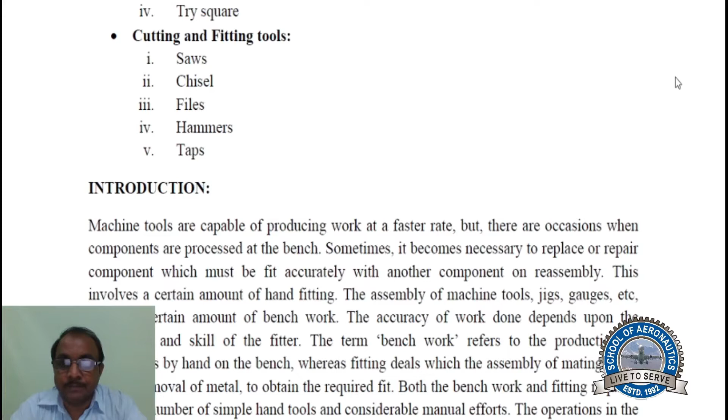Introduction. Machine tools are capable of producing work at a faster rate, but there are occasions when components are processed at the bench. Sometimes it becomes necessary to replace or repair a component which must be fit accurately with another component on reassembly.

This involves a certain amount of hand fitting. The assembly of machine tools, jigs, gauges, etc. involves a certain amount of bench work. The accuracy of work done depends upon the experience and skill of the fitter. The term bench work refers to the production of components by hand on the bench, whereas fitting deals with the assembly of matching parts through removal of metal to obtain the required fit.

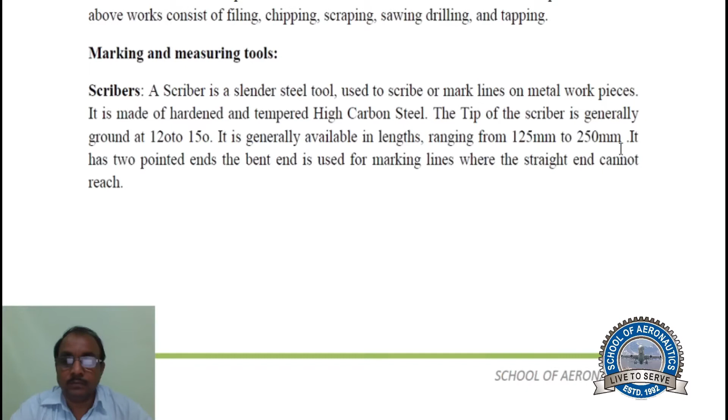Divider. It is basically similar to the calipers except that its legs are kept straight and pointed at the measuring edge. This is used for marking circles, arcs, laying out perpendicular lines by setting lines. It is made of case hardened mild steel or hardened and tempered low carbon steel. Its size is specified by the length of the leg.

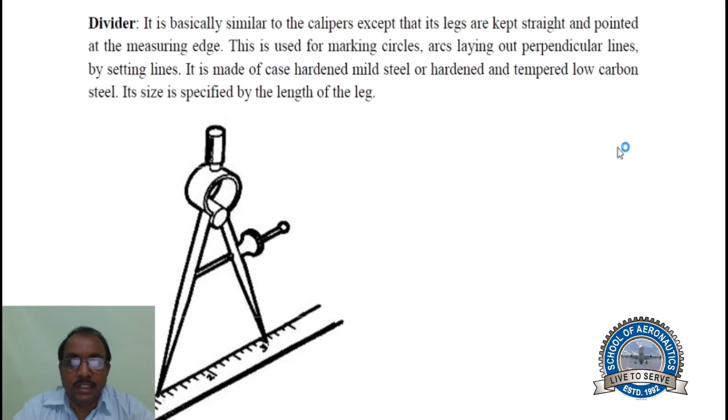Punches. These are used for making indentations on the scribed line to make them clearly visible. These are made of high carbon steel. A punch is specified by its length and diameter, say 150 and 12.5 mm. It consists of a cylindrical knurled body which is plain for some length at the top of it. At the other end, it is ground to a point. The tapered point of the punch is hardened over a length of 20 to 30 mm.

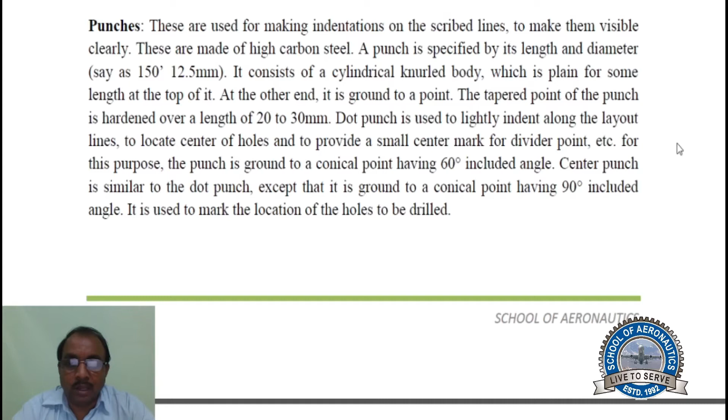Dot punch is used to lightly indent along the layout lines, to locate the center of a hole and to provide a small center mark for a divider point, etc. For this purpose, the punch is ground to a conical point having a 60-degree included angle. Center punch is similar to a dot punch except that it is ground to a conical point having a 90-degree included angle. It is used to mark the location of the holes to be drilled.

Try square. It is a measuring and marking tool for 90-degree angles. In practice, it is used for checking the squareness of many types of small work when extreme accuracy is not required. The blade of the try square is made of hardened steel and the stock of cast iron or steel. The size of the try square is specified by the length of the blade.

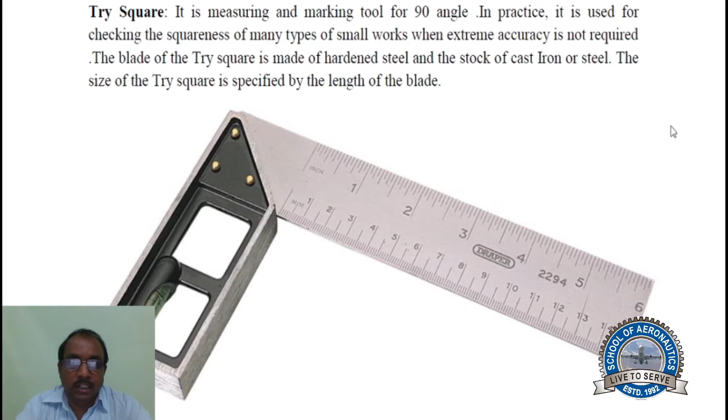Cutting and fitting tools. Saw. The hacksaw is used for cutting metal by hand. It consists of a frame which holds a thin blade firmly in position. A hacksaw blade is specified by the number of teeth per centimeter. Hacksaw blades have a number of teeth ranging from 5 to 15 per centimeter.

Blades having a lesser number of teeth per cm are used for cutting soft metals like aluminum, brass and bronze. Blades having a larger number of teeth per centimeter are used for cutting hard metals like steel and cast iron. Hacksaw blades are classified as all hard and flexible type.

The all hard blades are made of high speed steel hardened and tempered throughout to retain their cutting edge longer. These are used to cut hard metals. These blades are hard and brittle and can break easily by twisting and forcing them into the work while sawing. Flexible blades are made of high-speed steel or low-alloy steel, but only the teeth are hardened and the rest of the blade is soft and flexible. These are suitable for use by unskilled or semi-skilled persons.

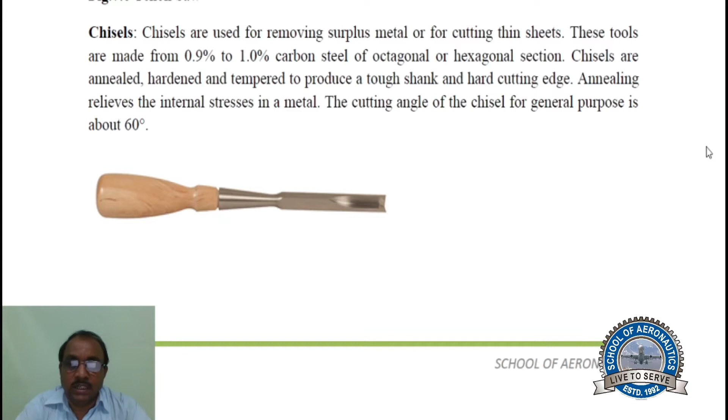Files. Filing is one of the methods of removing small amounts of material from the surface of a metal part. A file is a hardened steel tool having small parallel rows of cutting edges or teeth on its surface. On the faces, the teeth are usually diagonal to the edge. One end of the file is shaped to fit into a wooden handle.

The figure shows various parts of a hand file. The hand file is parallel in width and tapered slightly in thickness towards the tip. It is provided with double cut teeth on the faces, single cut on one edge and no teeth on the other edge. This is known as safe edge.

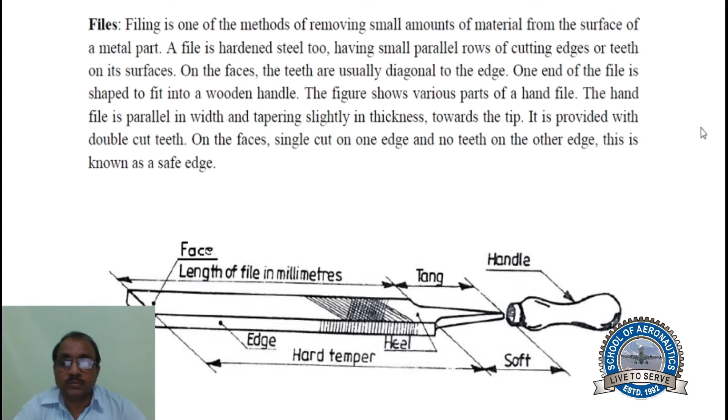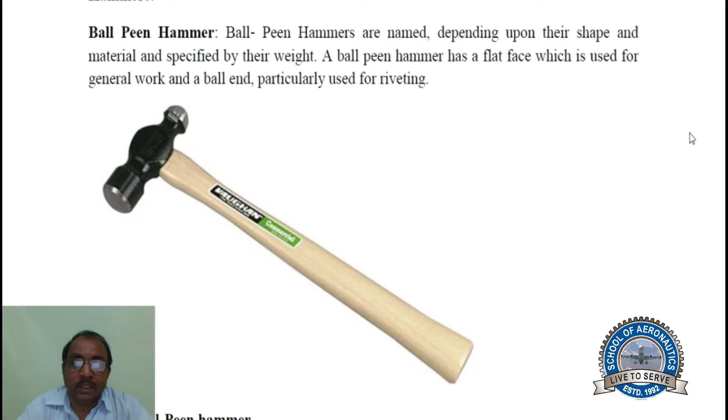Hammers. Ball peen hammer. Ball peen hammers are named depending upon their shape and material and specified by their weight. A ball peen hammer has a flat face which is used for general work and a ball end particularly used for riveting.

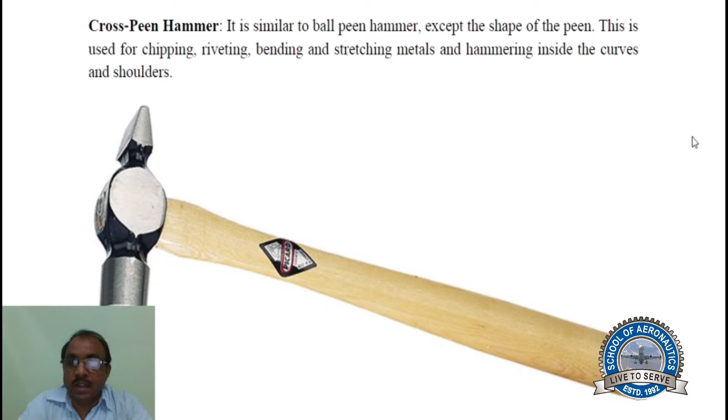Cross peen hammer. It is similar to the ball peen hammer except the shape of the peen. This is used for chipping, riveting, bending and stretching metal and hammering inside the curves and shoulders.

Straight peen hammer. This is similar to the cross peen hammer but its peen is in line with the hammer handle. It is used for swaging, riveting in restricted places and stretching metal.

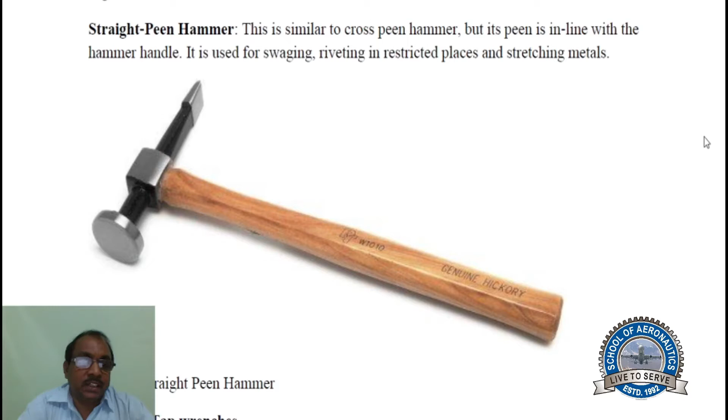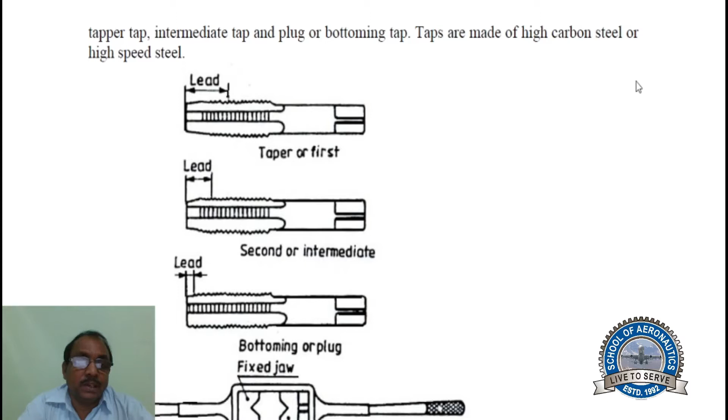Tap and tap wrenches. A tap is a hardened steel tool used for cutting internal threads in a drilled hole. Hand taps are usually supplied in sets of three in each diameter and thread size. Each set consists of a taper tap, intermediate tap, and plug or bottoming tap. Taps are made of high carbon steel or high speed steel.

Square filing. To file the given two mild steel pieces into a square shape of 48 mm side as shown in figure. Tools required: bench vise, set of files, steel rule, try-square, vernier caliper, vernier height gauge, ball peen hammer, scriber, dot punch, surface plate, angle plate, and anvil.

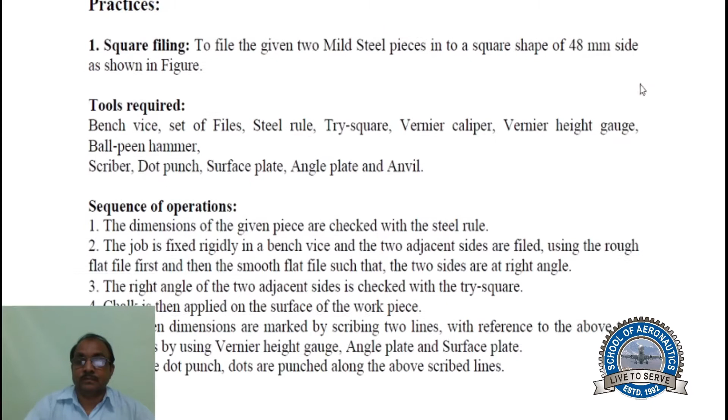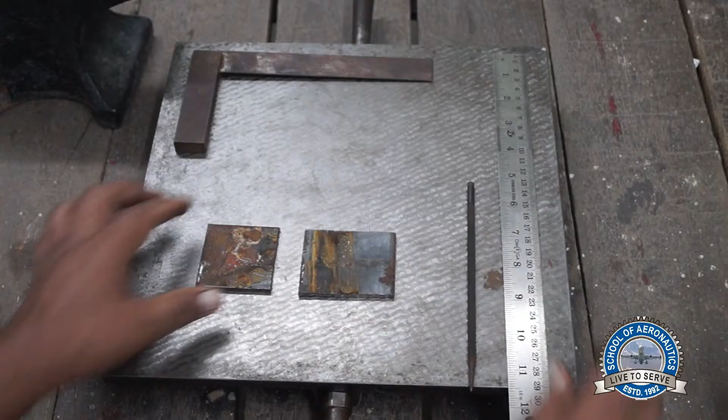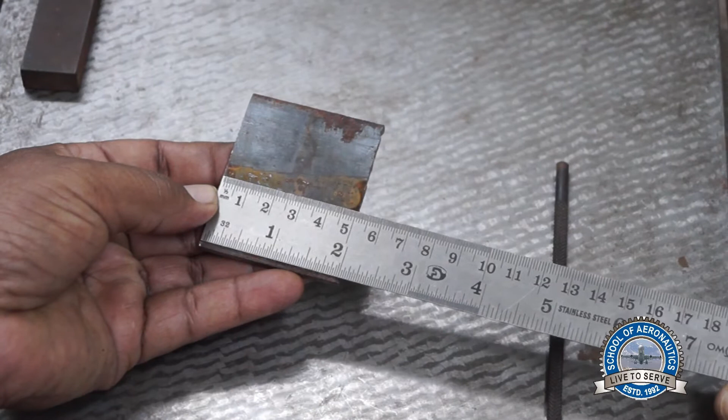Sequence of operation. The dimensions of the given piece are checked with the steel rule. The job is fixed rigidly in a bench vise and the two adjacent sides are filed using the rough flat file first, then the smooth flat file, such that the two sides are at right angle. The right angle of two adjacent sides is checked with the try-square.

Chalk is then applied on the surface of the workpiece. The given dimensions are marked by scribing two lines with reference to the above two datum sides by using vernier height gauge, angle plate, and surface plate. Using dot punch, dots are punched along the above scribed lines.

The two sides are then filed by fitting the job in the bench vise, followed by checking the flatness of the surface. As the material removed through filing is relatively less, filing is done instead of shaping.

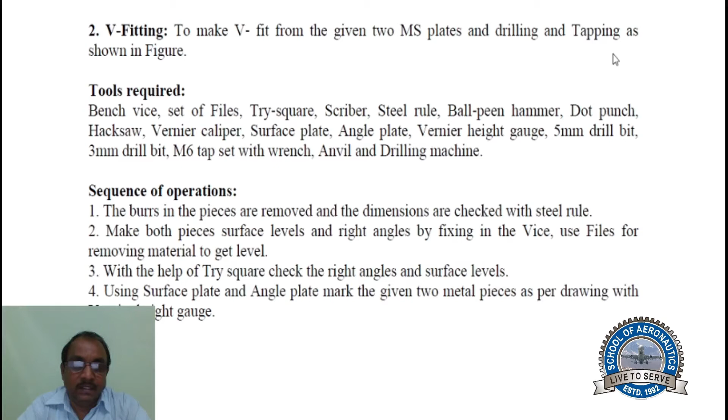Sequence of operations. The burrs in the pieces are removed and the dimensions are checked with a steel rule. Make both pieces' surfaces level and at right angles by fixing in the vise.

Use files for removing material to get level. With the help of try-square, check the right angles and surface levels. Using surface plate and angle plate, mark the given two metal pieces as per drawing with vernier height gauge.

Punch the scribed lines with dot punch and hammer, keeping on the anvil. Punch to punch gives 5 mm gap. Cut excess material wherever necessary with hacksaw frame with blade, drill bits and taps.

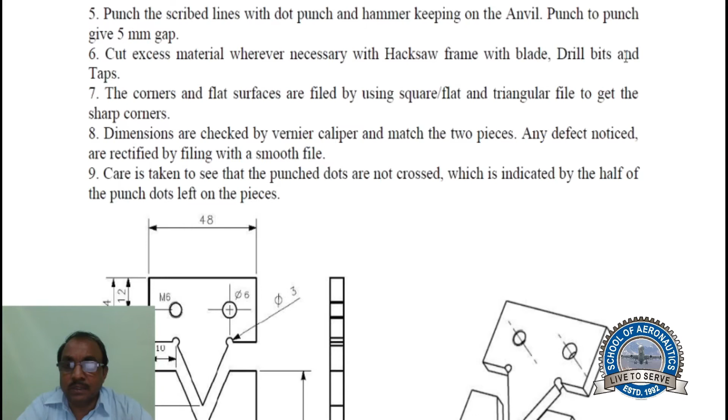The corners and flat surface are filed by using a square, flat and triangular file to get the sharp corner. Dimensions are checked by vernier caliper and match the two pieces. Any defects noticed are rectified by filing with a smooth file.

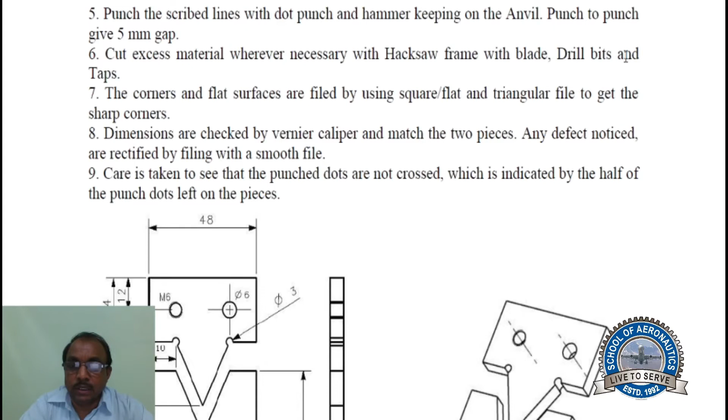Care is taken to see that the punched dots are not crossed, which is indicated by the half of the punch dots left on the pieces.

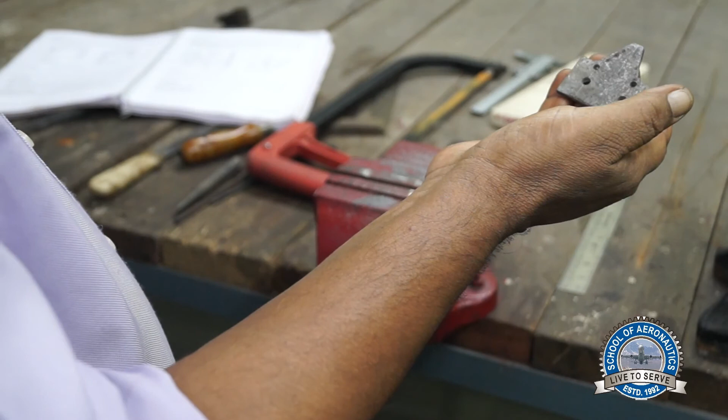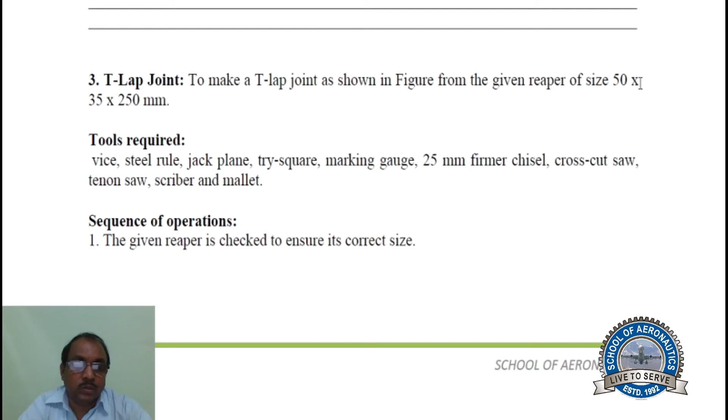T-lap joint. To make a T-lap joint as shown in figure from the given reaper of size 50 x 35 x 250 mm. Tools required: vise, steel rule, jack plane, try-square, marking gauge, 25 mm firmer chisel, crosscut saw, tenon saw, scriber and mallet. Sequence of operation.

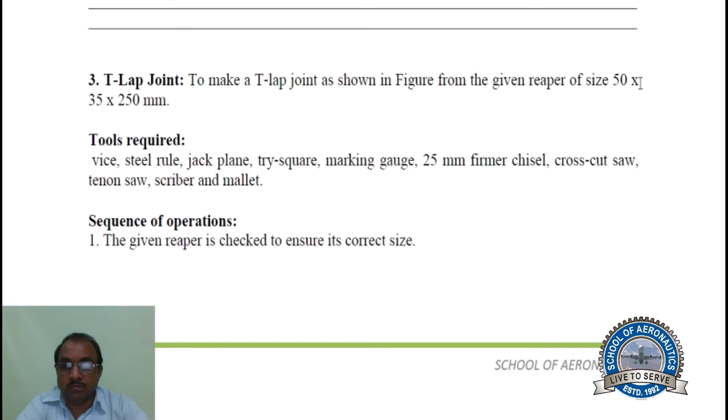The given reaper is checked to ensure its correct size. The reaper is firmly clamped in the carpenter's vise and any two adjacent faces are planed by the jack plane and the two faces are checked for squareness with the try-square.

Marking gauge is set and lines are drawn at 30 and 45 mm to mark the thickness and width of the model respectively. The excess material is first chiseled out with firmer chisel and then planed to correct size. The mating dimensions of the parts X and Y are then marked using a scale and marking gauge.

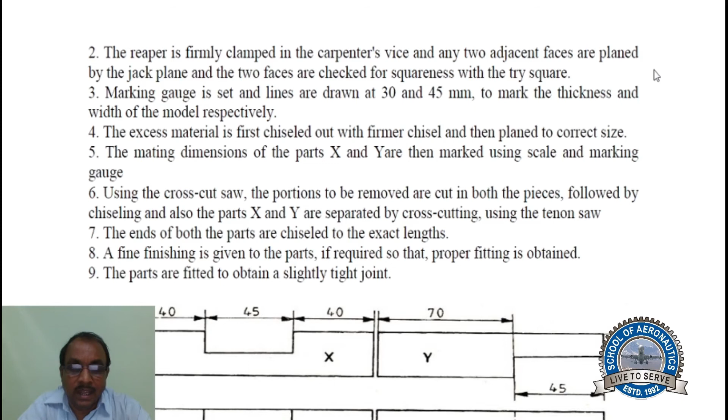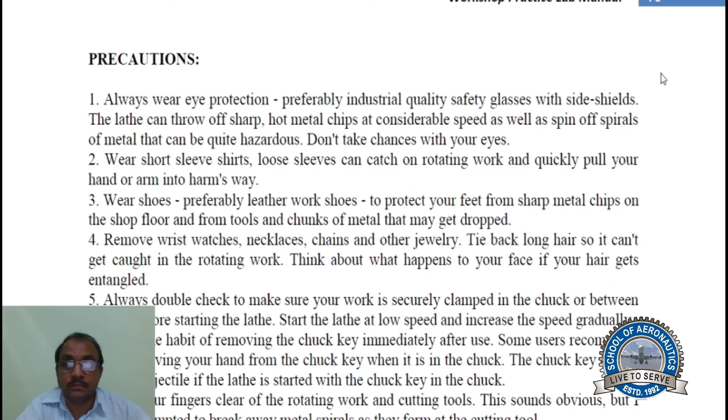Precautions: always wear eye protection, preferably industrial quality safety glasses with side shields. The lathe can throw off sharp hot metal chips at considerable speed as well as spin off spirals of metal that can be quite hazardous. Don't take chances with your eyes.

Wear short sleeve shirt. Loose sleeves can catch on rotating work and quickly pull your hand or arm into harm's way. Wear shoes, preferably leather work shoes, to protect your feet from sharp metal chips on the shop floor and from tools and chunks of metal that may get dropped.

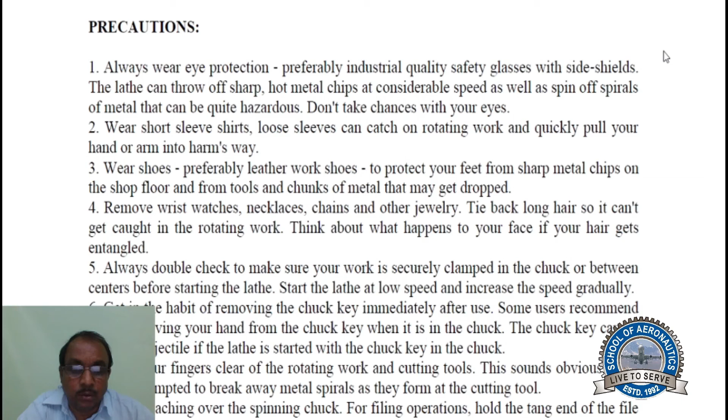Remove wristwatch, necklace, chain and other jewelry, tie back long hair so it can't get caught in the rotating work. Think about what happens to your face if your hair gets entangled. Always double check to make sure your work is securely clamped in the chuck or between centers before starting the lathe. Start the lathe at low speed and increase the speed gradually.

Get in the habit of removing the chuck key immediately after use. Some users recommend never removing your hand from the chuck key when it is in the chuck. The chuck key can be a lethal projectile if the lathe is started with the chuck key in the chuck.

Keep your fingers clear of the rotating work and cutting tools. This sounds obvious, but I am often tempted to break away metal spirals as they form at the cutting tools.

Avoid reaching over the spinning chuck for filing operation. Hold the tang end of the file in your left hand so that your hand and arm are not above the spinning chuck. Never use a file with a bare tang. The tang could be forced back into your wrist or palm.